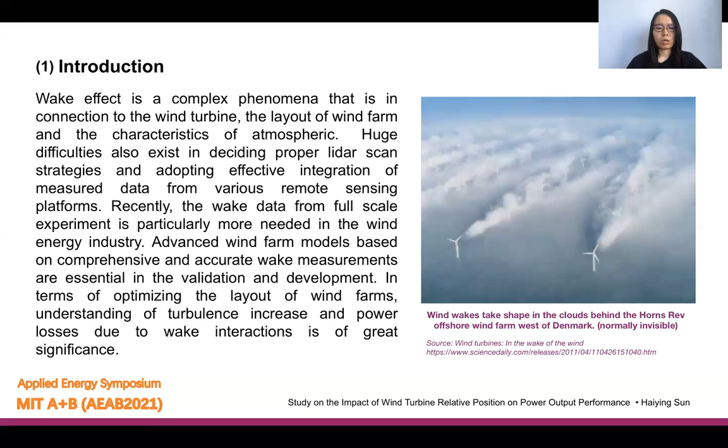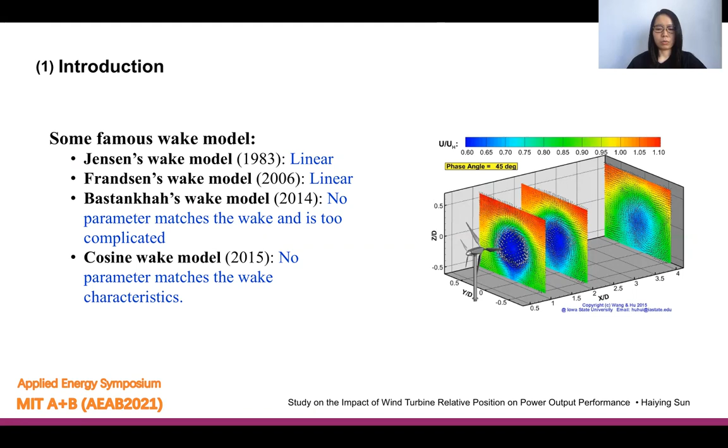To investigate the influence of relative positions of wind turbines on power output performance, a more advanced wake model is necessary. Therefore, this study first develops a 3D wake model and then investigates the impact based on this wake model. In the second section, a novel 3D wake model developed by our research group will be introduced.

Most wind farms cannot produce as much power as they were predicted, caused by inaccurate wake models and inefficient wind farm prediction tools. The linear wake model assumes the wind distribution at any downstream distance is the same. Based on the linear wake model, a 2D wake model was developed, which can estimate the Gaussian-shaped wind speed in the horizontal direction. However, these wake models cannot consider the wind variation in the vertical direction.

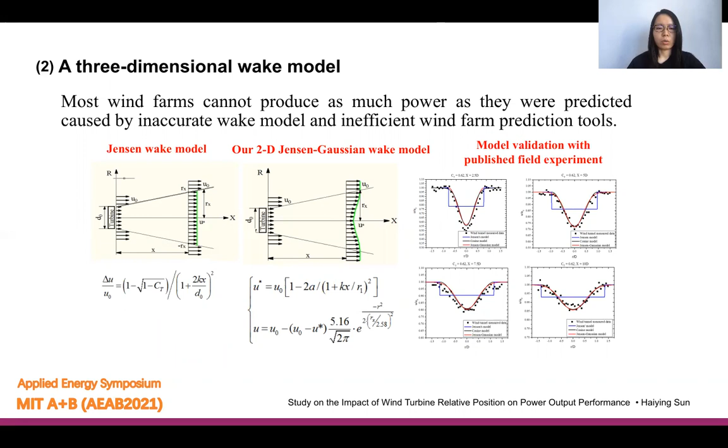Continuing the aforementioned study, a novel analytical 3D wake model has been presented to help describe the wind distribution in space at a wind farm. The wake model is based on the momentum conservation theory and assumes that the wind deficit is Gaussian-shaped, and the wind velocity is continuous at the wake boundary.

It can calculate the wind velocity at any spatial position with high accuracy and little computational cost. The wake model considers the height direction's influence, which makes it more advanced than other analytical wake models. The expression of the wake model is demonstrated.

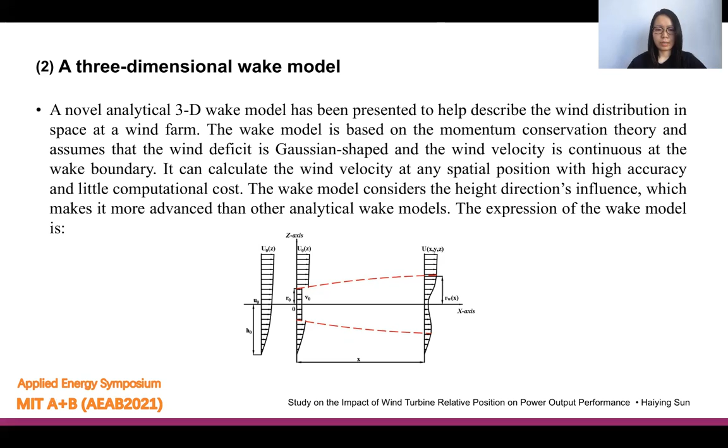There are 3 assumptions in the wake model. The first assumption is that the wind velocity deficit at downstream distance is Gaussian distributed. The second assumption is based on the momentum conservation theory, and it means that the flow flux is conserved in a specific area at any wake section. The last assumption is that the wind velocity is continuous at the wake boundary.

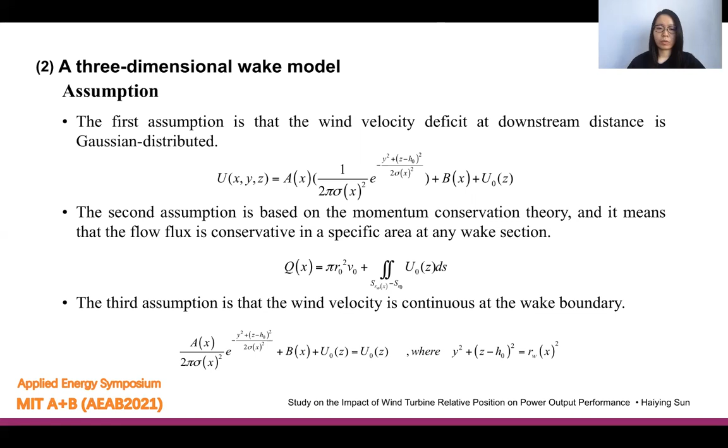In the next section, I will introduce the impact of downstream distance, horizontal distance, and hub height of wind turbines. In the following part, 2 adjacent wind turbines will be taken as an example to investigate the impact of hub height change of one wind turbine on another wind turbine.

The effect of downstream distance on power is similar to that on equivalent wind speed. At a certain hub height, the increase in the downstream distance can increase the power to a certain extent. However, when the wind speed is larger than the rated wind speed, the power performance will not continue to improve. With a higher hub height, the downwind turbine can reach the rated power at a relatively close downstream position.

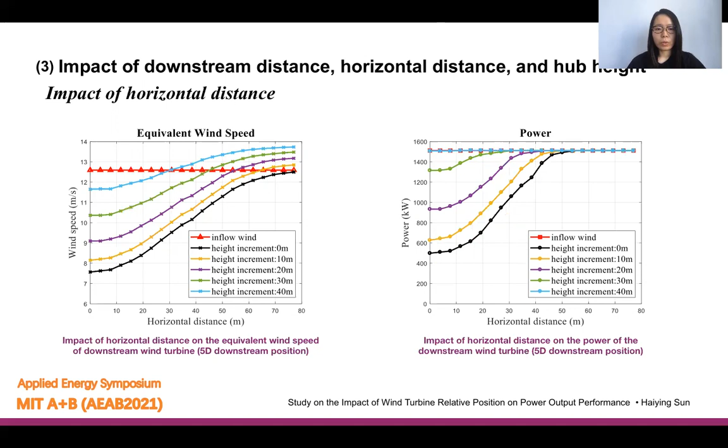Changing the horizontal distance is another way to improve the performance of the downstream wind turbine. It is clear that increasing the horizontal distance will lead to an increase in equivalent wind speed, as the effect from the upstream wind turbine can be avoided. For a higher hub height, the turbine can have a larger equivalent wind speed at the same horizontal distance position. When the hub height increases to 40 meters, it only needs to move 30 meters horizontally to avoid the influence

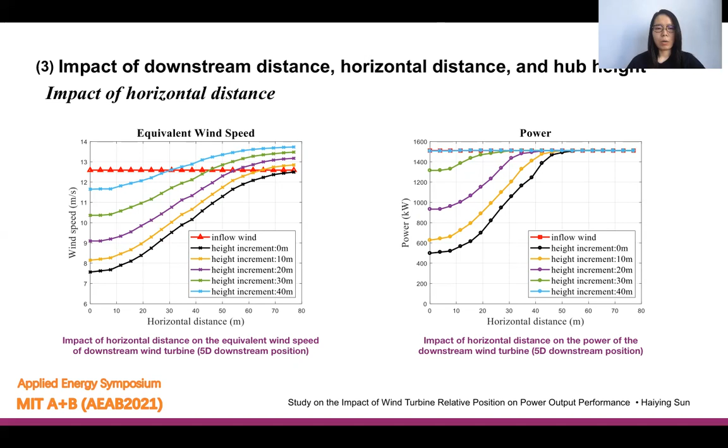of the wake effect. For the power output, at the lower hub heights, increasing the horizontal distance can significantly increase the power output. For example, at the original hub height, the power at the central position is only 500 kilowatt. As the horizontal distance increases to 55 meters, it quickly increases to rated power of about 1,500 kilowatt. Well, when the hub height is larger than 40 meters, which may be different in other cases, the power output performance will not continue to improve.

Changing the hub heights of either the upstream or downstream wind turbines may help improve the power generation. Changing the upwind turbine will have a significant impact on both itself and the downstream wind turbine. The downwind turbine has the smallest equivalent wind speed when it is fixed at the same height as the upstream one. The wind deficit is maximum at the hub height. Therefore, no matter increasing or decreasing the upstream hub height, the wake impact on the downstream will be reduced. This phenomenon is especially noticeable when the two turbines are close together.

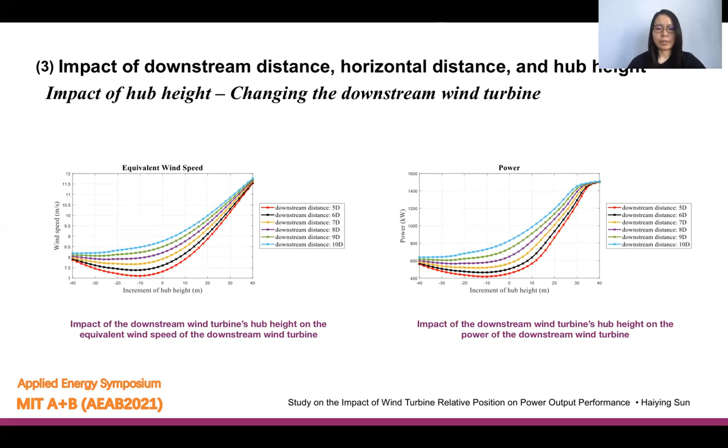In the next section, the main conclusions drawn from this study are summarized. Firstly, an engineering three-dimensional wake model is introduced. The wake model has high accuracy and can quickly predict wind speed at any downstream position and at any height. Secondly, the hub height and the layout have a significant impact on the wind speed and power performance of its own and its downwind wind turbines. For two wind turbines, increasing the relative distance in downwind direction and horizontal direction can both avoid the wake impact on the downstream wind turbine, thus increasing the wind speed and power output.

Special attention should be paid when changing the hub heights of wind turbines. Increasing the hub height is definitely beneficial to power output, but decreasing the hub height may have different results. The influence from wakes can be reduced, but the equivalent wind speed will be decreased as well. Finally, overall, the influence should be evaluated according to the specific hub height increment and relative downstream distance.